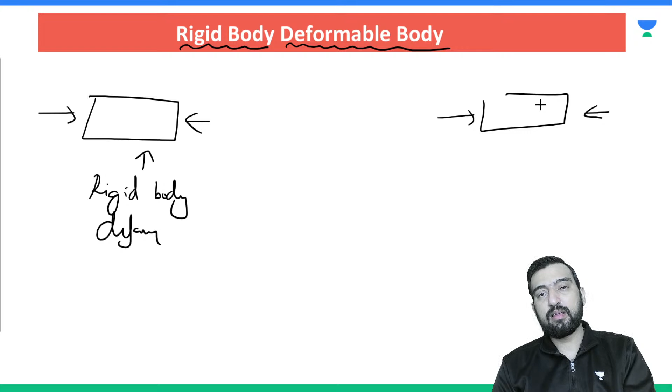Whereas deformable body, on the application of forces, they change their shape and size. They can be contracted, they can be expanded, their volume can be lesser, their volume can be more. They can show you some transverse lateral deformation and all. So this is the property of deformable body. So strength of material is all about deformable body, and it's all about the internal forces, and due to internal forces stress induced.

Whereas engineering mechanics is just like your class 11th physics, where you find acceleration, angular acceleration, velocity, displacement and all. You can also say that in mechanics, in rigid body, you are making a net force, and due to that net force it shows you motion.

Whereas in strength of material, we try to keep the equilibrium of forces such that the stresses and strain developed in the members allow these deformable, elastic members to take the external load. By considering the action of external load, they show reaction in the form of stretching or shrinking, by contraction or expansion.

Therefore we can also say that SOM is deformable body physics, whereas engineering mechanics is rigid body physics. Got it? So rigid body physics is engineering mechanics, and deformable body physics is strength of material.

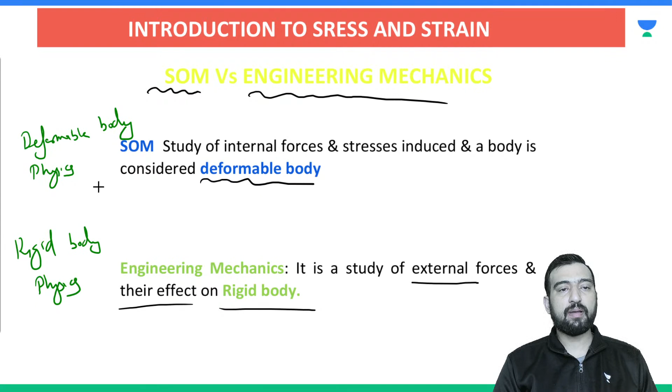For rigid body versus deformable body, I already told you that here the distance, shape, and dimensions don't change on the application of load. Here, in deformable bodies, the dimension or shape may change on the application of load.

Okay, so the type of stresses. What is stress? Stress is developed due to the internal force, and we can say that stress is internal force over area.

So why do we always deal with stress, not pressure? Can we calculate the maximum pressure a member can take, and design according to it? Dear Prakash, first of all you are asking why we always deal with stress, not pressure?

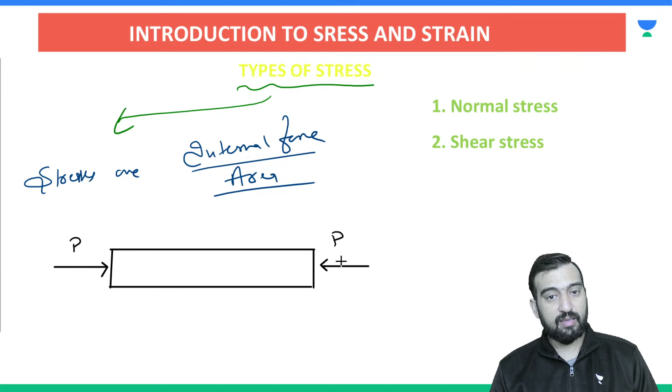Then P over area is not necessarily the stress. Maybe that stress is magnitude-wise P upon area only. But whenever you draw its free body diagram, it may look like this is P, and this is also P just to maintain equilibrium, and here it is also going to be P, acting on the remaining bar. So this P upon the cross-sectional area is developed due to the application of external load only.

But sometimes the stress is not developed as equal to the application of load. Such things we see in subjects like theory of failures, which explain all the consequences. These forces can be different in different orientations, so we have to be more accurate. More accuracy can be developed in terms of stresses, not pressure.

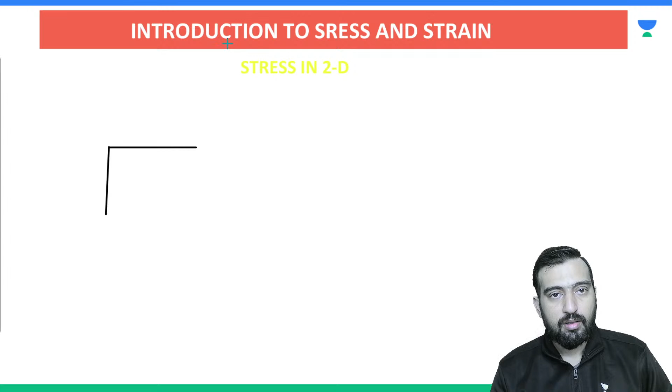So how many normal forces are possible? Suppose this is sigma 1, this is also normal stress - sigma 2. Now shear stresses are also possible. So shear stresses are also possible.

Shear stresses - if these surfaces look like this, then in order to maintain moment equilibrium, the shear stresses on the adjacent faces would be equal, counteracting each other, so that the net clockwise couple and net anti-clockwise couple remain the same. But the notation would be different - if it is tau, and this face is yx, then on the face x it is tau xy, and similarly this is also tau yx, this is also tau xy.

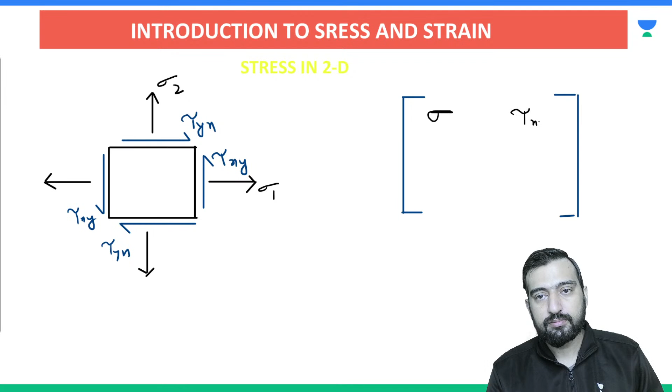So one shear and two normal stresses are there. If I want to write them in matrix form, then it would be sigma 1, and this would be sigma 2. Like that we can write the stresses in 2D.

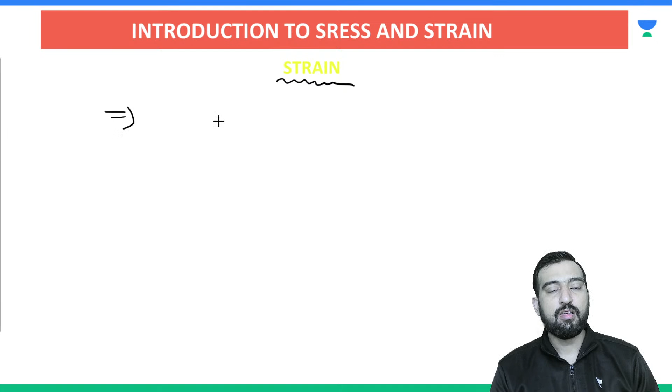So strain is a change in the dimension with respect to the original dimension. So if I want to write the general definition of strain, simply you can write it as a change in dimension with respect to the original dimension.

Okay, are you getting the point or not? So again like stresses, strain can also be of two types: one is normal strain and another is shear strain. What is normal strain? Normal strain is just like your longitudinal strain, and shear strain is your tangential strain.

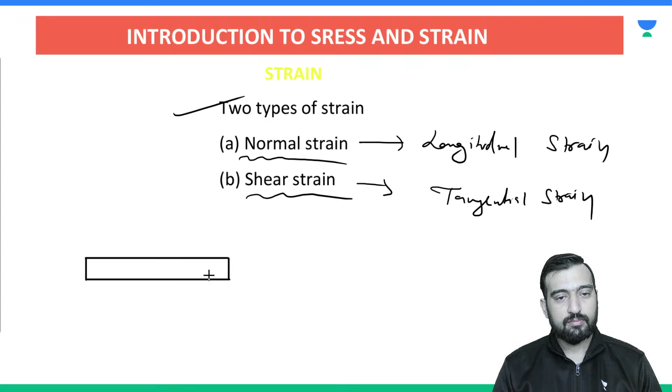Suppose this is some stress and due to this the dimension gets changed, so it is going to increase like this.

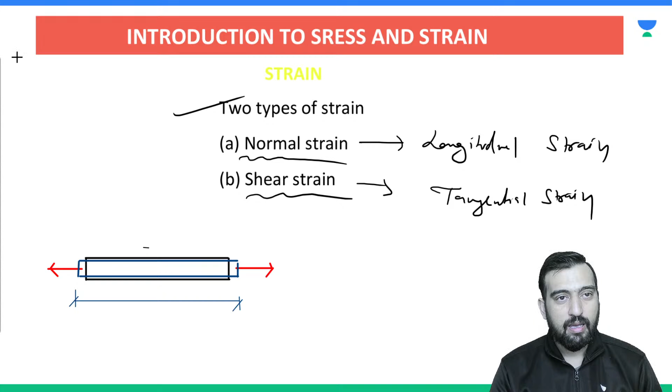So let's say the original dimension of this bar is L, or let's say it is L naught, and after this force, extension is there. Now it becomes L naught plus delta L. So longitudinal strain is what? Change in dimension with respect to original dimension.

But shear strain is somewhat different. What is there in shear strain? What do we do in shear strain?

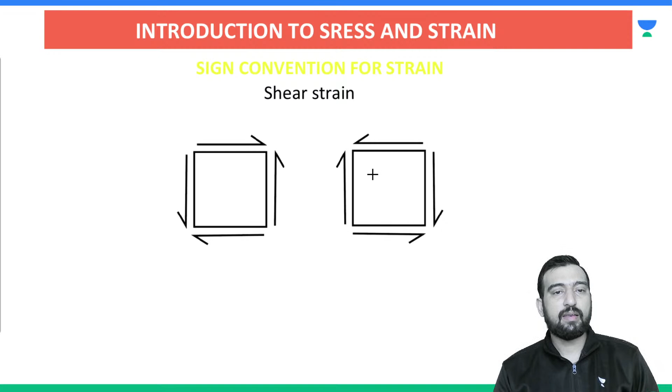So for shear strain, we are taking this one as positive, and this shear strain as negative. As per convention, we take it positive or negative. There is one more way to identify positive and negative, so let me discuss that here too.

Like here I called this tau yx positive, why? There was a logic behind it. You could ask, sir, when do we take it positive, when do we take it negative? Like normal stresses, it's quite clear - if it's going away we take it positive, if coming towards we take it negative. So compressive stress is negative, tensile stress is positive. But these things are not easy to visualize in shear. In shear, what should be the convention? Anybody? In shear stress, what should be the convention?

This is xy and this is yx. So both of them I have shown as positive. But what is the convention? Tell me, what is the convention?

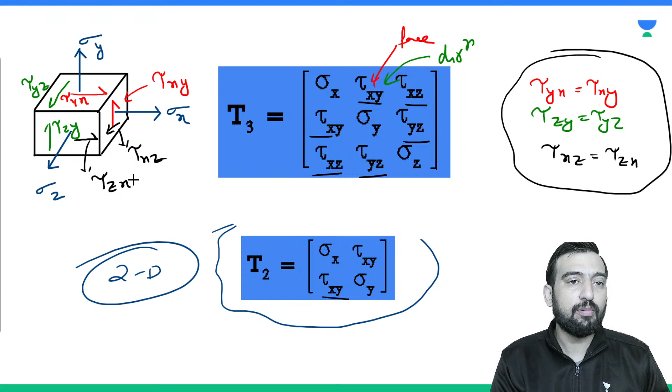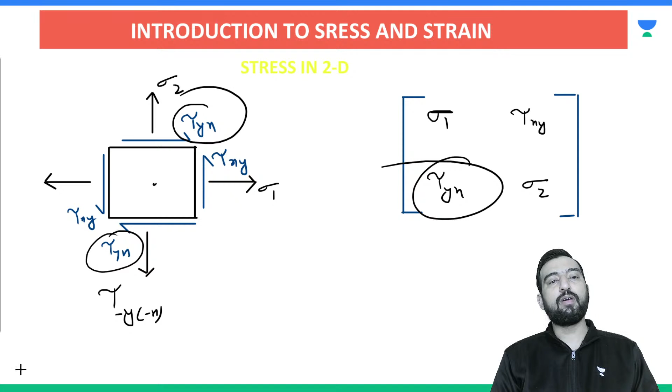Okay, so positive face, positive side, positive direction - it's positive. And negative face, negative side, negative direction is also positive, because negative times negative is also positive. Like this is positive yx. What about this one? It is negative y, and direction is also negative, so minus y times minus x is also tau yx. Like that we can define the sign convention of stresses.

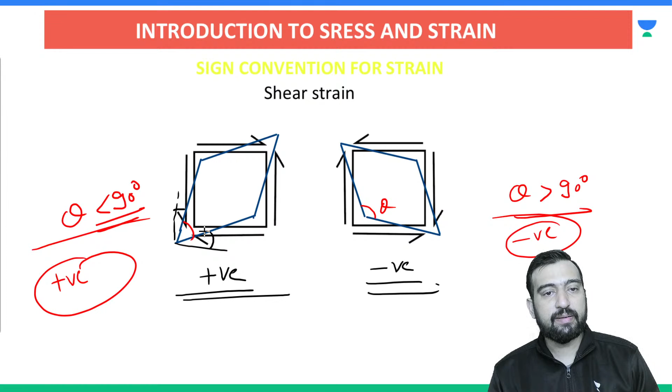What is this gamma xy by 2? Suppose this is the total strain. This plus this is gamma xy. Let's suppose the initial angle was 90 degrees, so it is now 90 minus theta, so gamma is going to be 90 minus theta. Due to the symmetrical or equal value of shear stress developed on these two consecutive adjacent faces, the angles on both sides are considered to be the same. So if they are same, and total deformation is gamma, then on one side the deformation is gamma by 2. So let me call it gamma xy by 2, and gamma yx by 2. Like that we can define this.

So this is tau xy, so I am writing gamma xy by 2. This is tau yx, I am writing gamma yx by 2, because it is assumed the total strain - this plus this - is the total strain, and it is 90 minus theta, and this both strain has to be same because the same kind of stresses are originated on these two adjacent faces. So these two strain values are also same, but the net strain in this direction is this angle plus this angle, and fortunately both of these angles are same, so we are simply dividing these strains into half value.

Similarly, tau xz is gamma xz by 2, gamma zx by 2; tau yz is gamma yz by 2, gamma zy by 2. Okay, so it's going to be like this.

Are you getting the point or not? Tell me, everybody. Any doubt to anyone? So, what is the total strain in the xy plane? Anybody? What is the total strain in the xy plane?

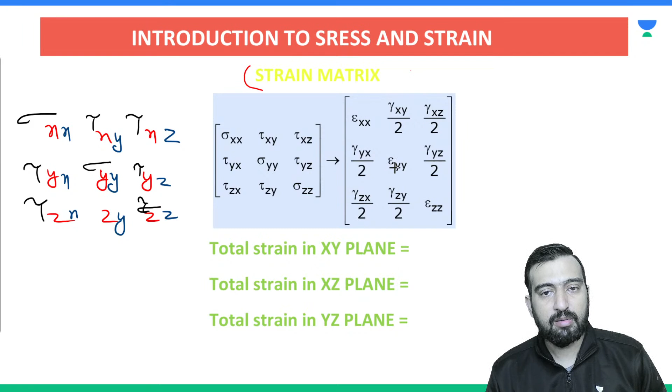How much will it be? Normal strain is epsilon yy - no doubt, sure. So how can you find the total strain, normal strain? This is the total strain in the xy plane. This is the total strain in the yz plane. This is the total strain in the zx plane.

I want to explain this with the help of a 2D figure. With the help of a 2D figure, we can explain it, dear. Suppose this is the deformation in the x direction, let's say u. This is the deformation in the y direction, let's say v. So what is the shear strain due to this u? It is del u with respect to transverse distance del y.

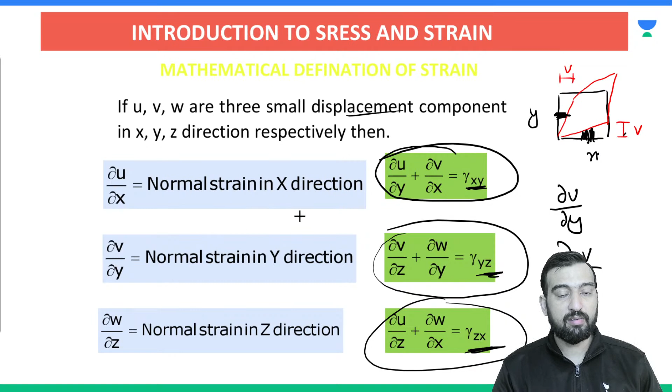Now we will be moving to the stress strain curve. What is the stress strain curve for mild steel? It is the second aspect of this chapter. We used to read this curve so many times in civil engineering - in Steel, in RCC, and in SOM too, where it gets the most attention.

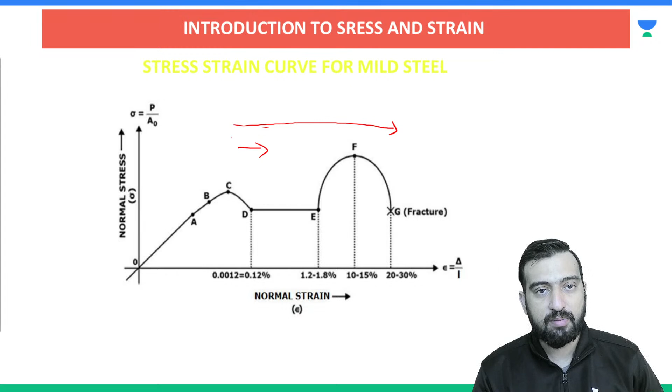So this is the meaning of this end-game marathon session. This is the stress strain curve for mild steel, and I was telling you that the longer after yield the fracture occurs, the more ductile the material is. If fracture happens immediately after yield, the material falls in the brittle category, like concrete. If fracture happens long after yield, the material falls in the ductile category, like steel, mild steel.

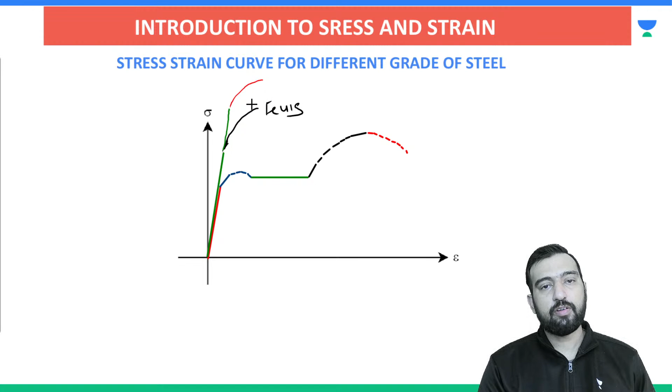Okay, then what happens with different grades? Different grades may look like this. It is Fe250, and let's say this one is Fe415, and this one is Fe500. So all these are different grades of steel — this is Fe415, this is Fe500, and this is Fe250 or mild steel.

So these are known as HYSD steel. As you increase the grade of steel, you can see their elastic limit is increasing. But what about their elastic limit? How can we determine it? Here there is not a clear upper yield point or lower yield point.

So in such material, what you do is take the help of proof stresses. For materials whose elastic limit is not clearly defined, we use proof strain and proof stresses. What is proof strain?

Proof strain is 0.2% strain, and the idea is that from 0.2% strain you draw a line parallel to the initial tangent. Wherever this line cuts your original graph, that point is considered your yield point. So they are cutting this graph here.

So this one you call Fe415 and this one you call Fe500. Okay, so this strain is how much? This is proof strain and it is 0.0020. So like that we can draw the stress strain curve for different grades of steel.

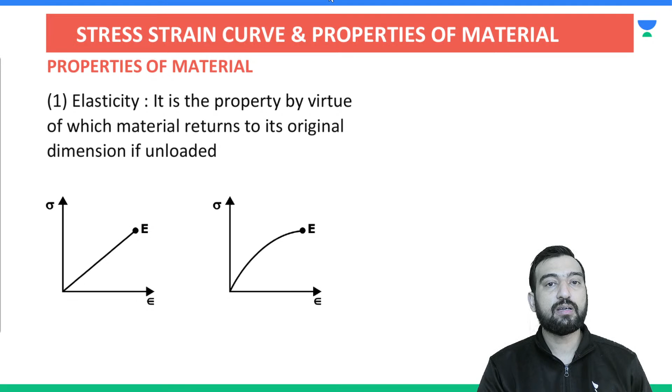Okay, the third one is creep. What is creep? It is the property due to which material undergoes additional deformation due to applied load with passage of time under sustained loading, called creep.

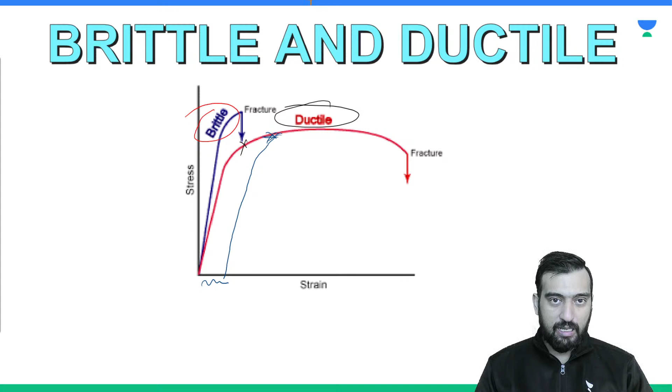You applied load within elastic limit and still there is some permanent deformation. This can happen only if that load is applied for a very long period of time. Such deformation occurs when the load stays applied for a long duration, and after removing it, there is some permanent deformation in your material.

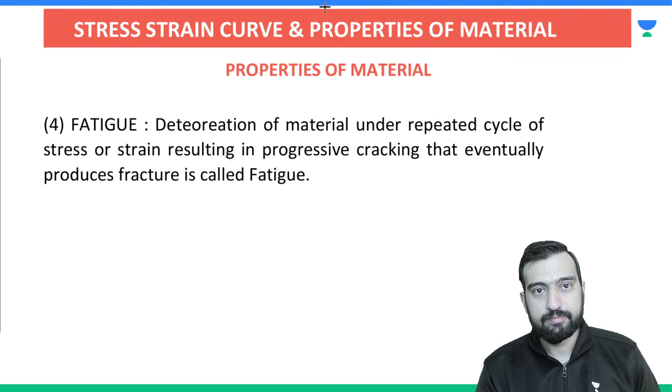Okay, so this is fatigue, and there are many other properties like resilience, toughness, hardness, malleability. What is resilience?

What is resilience? It is the property of material by virtue of which it absorbs energy when deformed elastically and releases it on unloading. So what is resilience, dear? It is like when you have done this.

Okay, so let's suppose you have a graph drawn like this. So here you can see that it is the resilience up to the elastic limit - whatever energy you have stored, that is resilience. In fact, it is the modulus of resilience if it is a stress-strain curve.

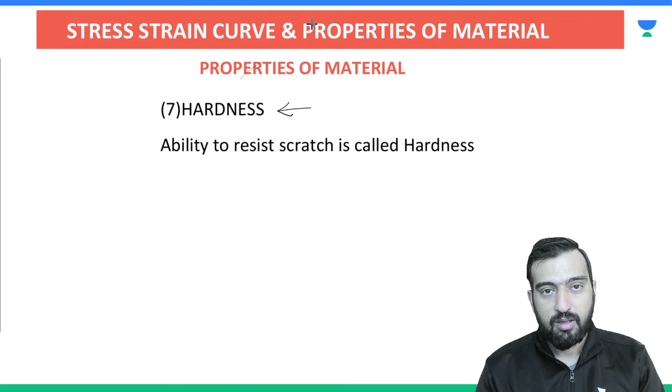So this may happen. This is the difference between toughness and hardness. Are you getting the point or not? Tell me.

Okay, so now what are all the stress-strain curves? Suppose if a material is elastoplastic.

Elasto means linear behavior, plastic means... okay. If your material is elastoplastic with strain hardening - so this is elastic, stress is proportional to strain, and it will come back after unloading.

And if it is with strain hardening, then this will go like this - instead of being perfectly plastic, it shows some strain hardening. This means beyond the elastic limit, your material will take more stress along with strain.

Okay, if it is an ideal rigid material, then no matter how much force you apply, the strain is always zero in an ideal rigid material. Are you agreeing?

Ideal rigid means strain is always zero, no matter how much stress you are applying. You continuously increase stress but there is no increment in the strain. Are you getting the point or not?

And what would happen in an ideal fluid? In an ideal fluid, without any normal force, you are going to have continuous flow, or you can say continuous strain. Is it clear?

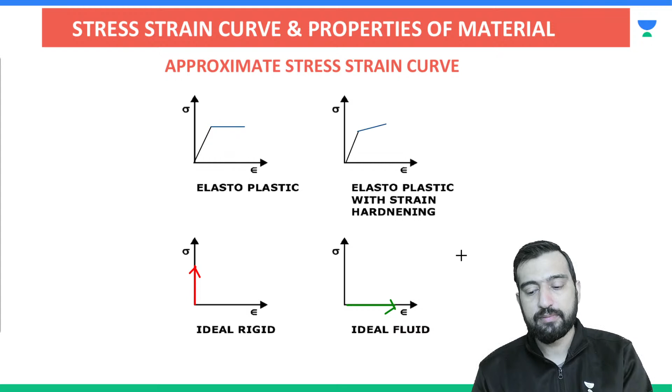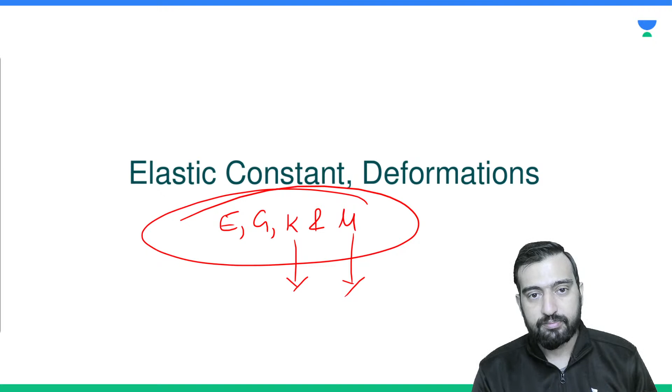So Young's modulus or modulus of elasticity, it is denoted by E. It is the ratio of normal stress to normal strain under the effect of uniaxial loading. Uniaxial loading means only in one direction.

Only in one direction you are going to apply this. It is not necessary that always the lengthier side is going to be the axial side. It may happen that in some cases you are going to apply force like this.

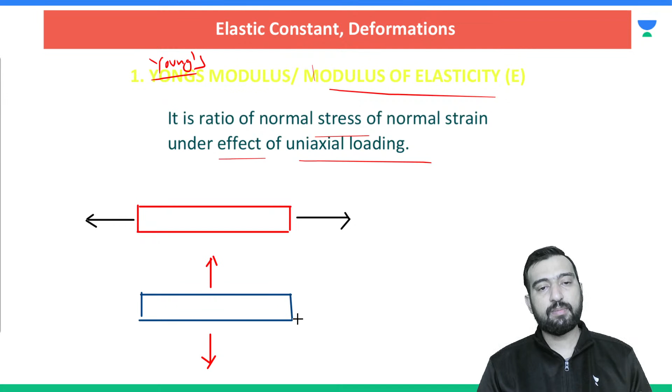Then here, Young's modulus would be the change in dimension along this direction with respect to its original dimension. So Young's modulus is always along the longitudinal axis.

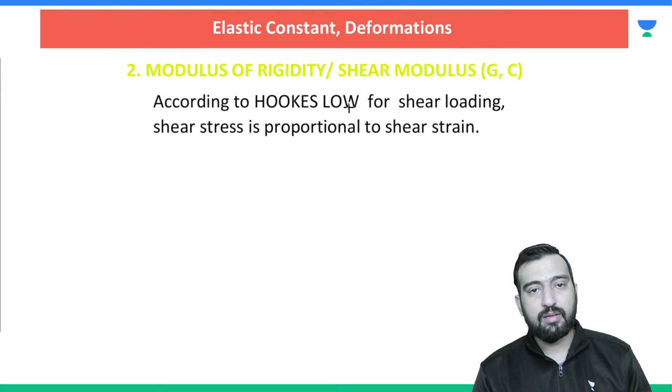Similarly, there is the shear modulus, or you can say modulus of rigidity. So what is the modulus of rigidity? It is simply the shear stress upon shear strain.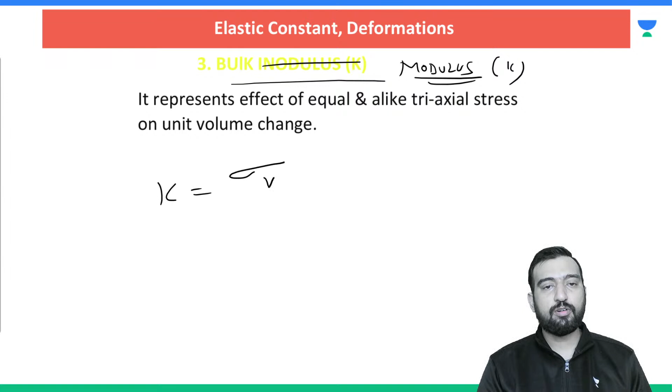Now if I am talking about the bulk modulus, what is it? It is the volumetric stress upon volumetric strain. So this is the bulk modulus.

So you know what is happening in bulk modulus. In bulk modulus you are applying stresses in multiple directions, like hydrostatic forces and all. This is the case of bulk modulus, due to this volume changes and all.

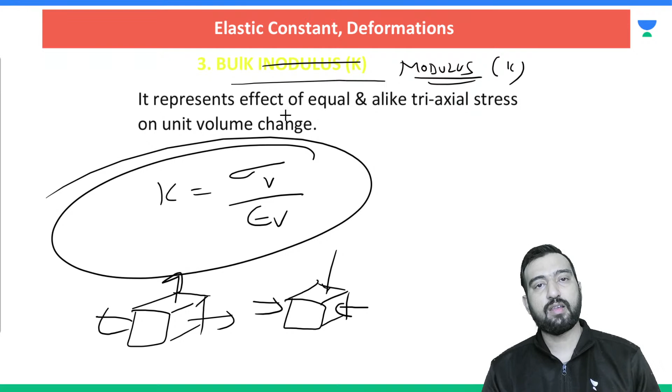In fact, bulk modulus value or strain in the volumetric direction you can calculate as per the strain in the x direction, y direction and z direction. So this is the Poisson's ratio, the ratio of lateral strain to the longitudinal strain under uniaxial loading.

So suppose if you are pulling this body, its dimensions, let's say this is L and this is B. So when you are stretching it, then it is coming out to be... then it is coming out to be what?

And it is B minus dB, del B. So here the longitudinal stress, longitudinal strain is how much? Here longitudinal strain is delta L over L. This is lateral stress, or simply strain is dB over B. So Poisson's ratio is defined as the ratio of lateral to longitudinal.

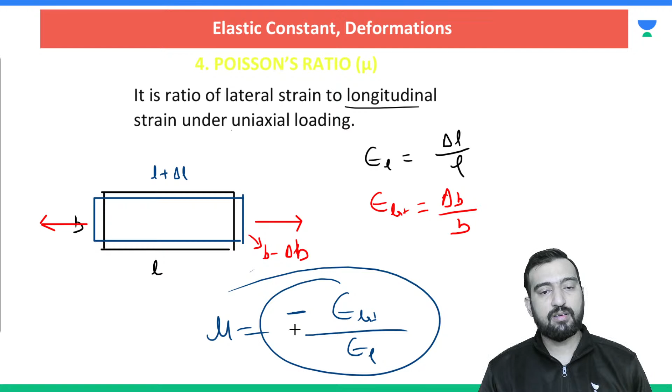Normally for engineering material this ratio lies between 0 to 0.5. For engineering material it is going to lie between 0 to 0.5. But if you are even considering the polymers and biological elements, then it may vary from -1 to 0.5.

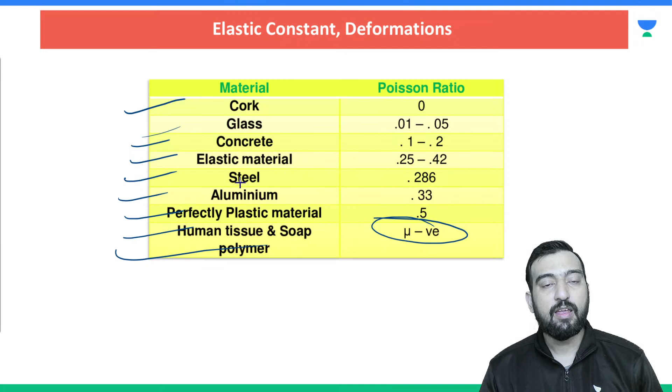So you can have a rough idea of this. So if human tissues or polymers etc. are not used, if you are talking purely about engineering material, then it is 0 to 0.5.

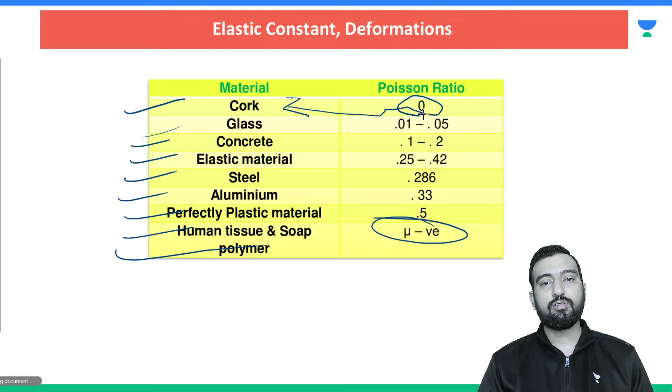And you know, due to this 0 Poisson's ratio, cork is used - we'll discuss that sometime later. So cork is going to show many unique properties due to the 0 Poisson's ratio. Meaning no change in the lateral direction along with the longitudinal direction. If you are making changes in the longitudinal direction, no impacts come in the lateral direction.

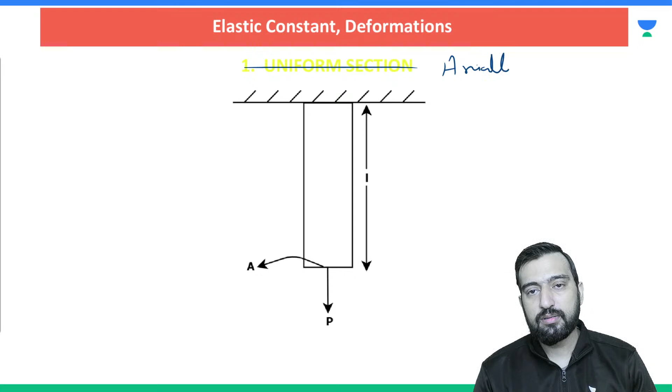Okay, so now for axially loaded members - what are axially loaded members? Where we apply forces along the axis. So what is happening here? If my member is axially loaded, then deflection is going to be PL upon AE.

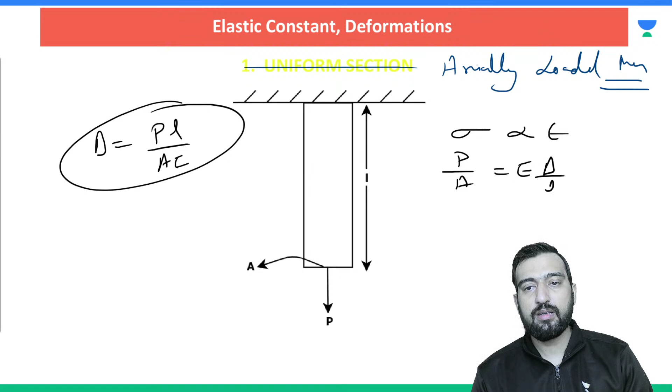As we know that stress is proportional to strain, longitudinal stress. What is longitudinal stress? Force upon area, and it is equal to the constant, and the constant, you know, is Young's modulus. What is strain? So delta is equal to PL upon AE. So this is the normal deformation in case of a uniform section.

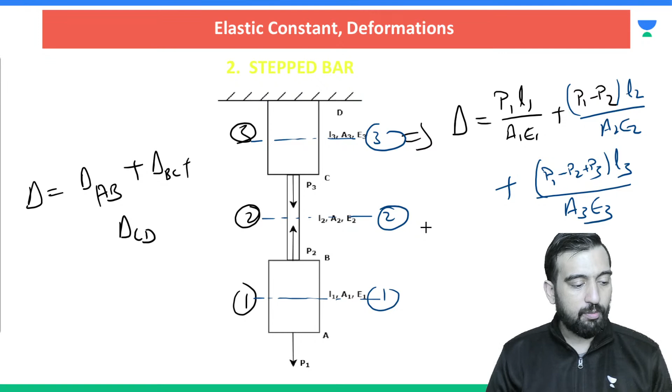Are you getting the point or not? Tell me. So this is a stepped bar.

Now we can also find the deflection due to rectangular tapered bar or the circular bar. Let me show you. Suppose if rectangular tapering is being done in one direction, like this.

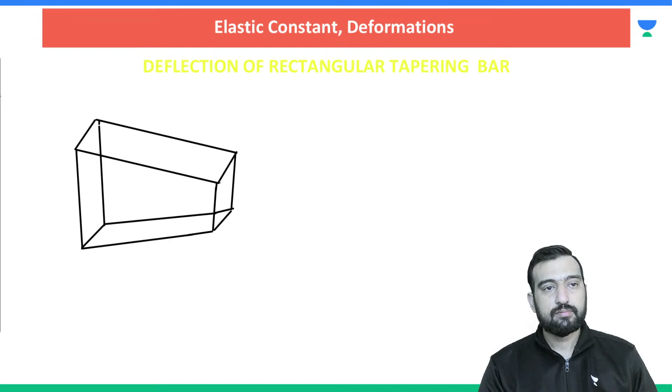Let's suppose this thickness is constant. Understand how the tapering is - it is not bidirectional, it is unidirectional. So tapering is unidirectional here, it is not bidirectional, okay.

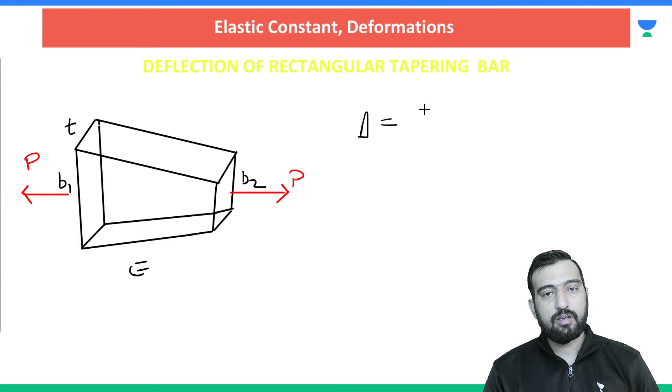So here the deflection is equal to P L upon A E. E we keep as it is. Now what is A? How much do we take A?

A we also take as the weighted average, sorry, logarithmic average. So what is the logarithmic average here? Who is varying here? Width.

Thickness is constant, so I can write thickness as it is. Now for width I can write it like B1 minus B2. It is the logarithmic average upon log of B1 by B2, log of B1 by B2.

Generally we use three types of averages in mathematics. One is arithmetic average, second is geometric average, third is logarithmic average. Arithmetic average is where the things are proportioning linearly or in a directly manner. Geometrically, where the things are varying geometrically, meaning the difference between two consecutive values is increasing rapidly and can be captured by some common ratio. Third is logarithmic, where the variation is like inverse, in an inverse manner. Here area is coming in the inverse, so it is in inverse manner variation.

Okay, yes, Anurag is absolutely right. It is T into B1 minus B2 upon log ln B1 upon B2.

Had it been a case of circular tapering beam, in that case what could we have written? Suppose this is my circular tapering beam, then what could we have written here? Suppose this is diameter 1, this is diameter 2, and length is same, and again it is subjected to same tensile load, let us call P and P. So anybody, what is the expression of deflection here?

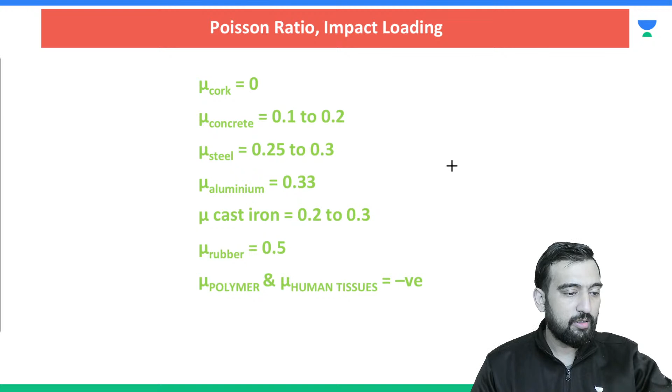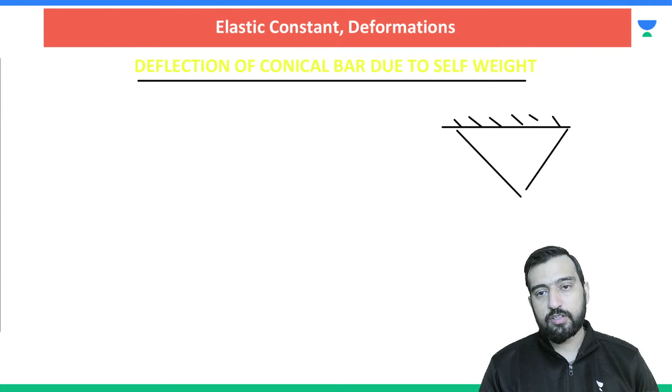What is the deflection of conical bar due to self weight? This is a cone. You can consider the unit weight of this cone as gamma, the length of the cone as L, and the radius as R. So what is the deflection due to self weight of the cone?

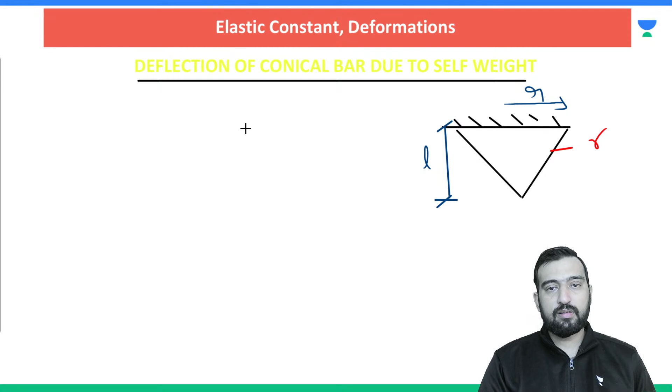The deflection is simply gamma L square upon 6E, where E is the Young's modulus. Please remember this equation. Or if you want to calculate it in terms of self weight, gamma is weight upon volume, and volume is pi by 3 into r square h.

So 1 by 3 pi r square into h, into 6. So this can be written as WL, where pi r square is area. If you solve this, it becomes 3 into 2 pi r square area into E, so delta is WL upon 2AE. So the deflection of conical bar due to self weight is WL upon 2AE, and here it is not by 3, it is by 2 only. Yes, Anurag is right, it is by 2 only.

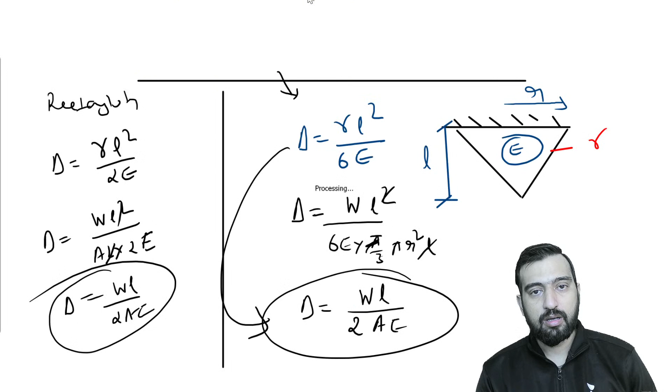If this were a rectangular beam case instead of conical, what would come due to self weight? It is gamma L square upon 2E, and gamma is equal to weight upon volume. Volume would be area into L, into 2E. L and L cancel, so the answer comes to WL upon 2AE. So it is again half of self weight, due to the half of self weight. So rectangular tapering and circular tapering we have seen.

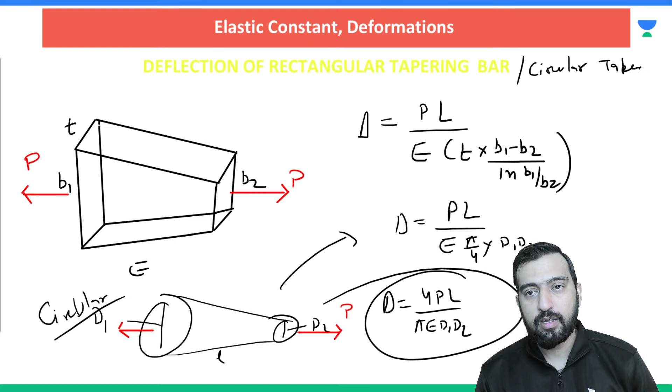Poisson ratio is minus lateral upon longitudinal. This we have already seen.

Now what are the temperature stresses? From class 11th onwards, in thermodynamics, we have seen that whenever we increase the temperature, the length, area as well as volume of the object changes. If the temperature is increasing, this change is positive. If the temperature is decreasing with respect to the standard temperature, then these changes are negative.

If I am talking about linear expansion, then the incremented length of any dimension can be written as delta L is equal to initial length into alpha into delta T, where delta T is the difference in temperature, which you can calculate either in degree Celsius or in Kelvin. Alpha is known as the coefficient of thermal expansion and L is the initial length of the material. So if you simply want to check how much your material length has increased or decreased, it is L alpha delta T, isn't it?

So you can compare the coefficient of thermal expansion of various materials like copper, brass, aluminum, and steel. Aluminum has the highest coefficient of thermal expansion, then brass, then copper, and steel has the least coefficient of thermal expansion. There is one more beauty of steel here: its coefficient of thermal expansion exactly matches that of concrete, and this is the reason why steel is very widely used in concrete.

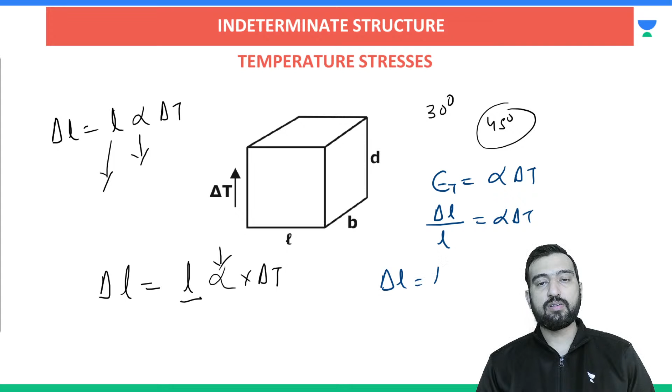Actually it is said that thermal strain is simply alpha delta t. And what is thermal strain? Initial change in dimension due to the temperature upon original dimension is equal to alpha delta t. So change in dimension is equal to L naught alpha delta t. Just I am comparing the value of alpha of different materials which we commonly use in strength of material - it is for copper, brass, aluminium and steel. Copper, brass, aluminium और steel के लिए हम use करते हैं.

So deflection of conical bar is equal to 1/3 of the prismatic one. हाँ, ये आप कह सकते हो कि डिफ्लेक्शन ऑफ कॉनिकल बार इज इक्वल टू 1/3 ऑफ द प्रिज्मेटिक बार. बट आपने सेल्फ वेट बाय 3 लिखा था पहले, इसलिए मैंने आपको ऑब्जेक्ट किया. इट इज सेल्फ बाय 2 ओनली. Yes, if we are comparing it with respect to the rectangular, then it is 1/3. आप देख सकते हो यहाँ पे, मैं दोबारा दिखा देता हूँ आपको - ये 1/2 है, ये ऐसे देख लो 1/2 आ रहा है, ये 1/6 आ रहा है. So 1/3 times of rectangular, this you can say.

चलो, so these all are the coefficient of. Is it clear, dear Preeti? सचिन क्लियर, अच्छा ठीक है.

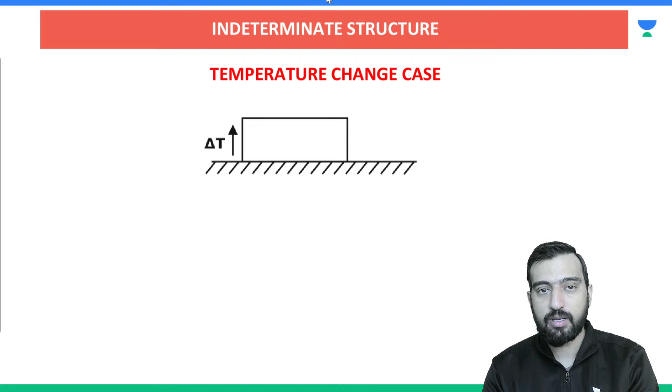अच्छा ये है हमारे अलग अलग मटेरियल के कोएफिशिएंट ऑफ थर्मल एक्सपेंशन. मतलब जब टेम्परेचर चेंज होगा तो सबसे ज्यादा इंपैक्ट इन चारों मटेरियल में कौन दिखाएगा? एल्युमिनियम, फिर उसके बाद ब्रास, फिर कॉपर, फिर स्टील. तो स्टील का कोएफिशिएंट ऑफ थर्मल एक्सपेंशन इन चारों में कम है. अच्छा, टेम्परेचर बढ़ेगा तो आपकी लेंथ भी बढ़ेगी, आपकी विड्थ भी बढ़ेगी, आपकी हाइट भी बढ़ेगी. तो जनरली होता क्या है कि due to the change of temperature your each and every dimension changes if it is free to do so. अगर कोई रेस्ट्रिक्शन नहीं है तो टेम्परेचर बढ़ने के कारण डायमेंशंस चेंज होंगे, और बढ़ने के कारण डायमेंशंस बढ़ेंगे, कम होने के कारण डायमेंशंस कम होंगे.

OK, if the deformation due to temperature change is restrained then stress will be induced. And normally in indeterminate structures, अगर देखो मैं यहाँ पे एक बार लगाऊं, मैं कहूं कि यार यहाँ पे मैंने टेम्परेचर बढ़ा दिया, but this time the material is not free to expand. No doubt due to the increment of temperature, this member would be trying to elongate itself, but it is not getting proper space. So when those thermal strains which would have been there if it would be free, then those temperature strains or thermal strains will be leading towards your thermal stresses, dear. Will be leading towards the thermal stresses.

So whatever would have been the thermal strain, now the thermal stresses originated would be in that manner. Suppose earlier the thermal strain developed was 2 units, now when those 2 units strain is blocked, the stresses will develop accordingly. Suppose if earlier strain developed in thermal was 4 units, now the stresses developed would be double of that - it would be relative. ओके तो या तो टेम्परेचर बढ़ने के कारण डायमेंशंस बढ़ेंगे, अगर आप डायमेंशंस बढ़ने नहीं दे रहे हो देन करस्पॉन्डिंगली स्ट्रेसेस आएंगे, तनाव आएंगे आपके मटेरियल के अंदर. सो दीज आर नोन एज द थर्मल स्ट्रेसेस.

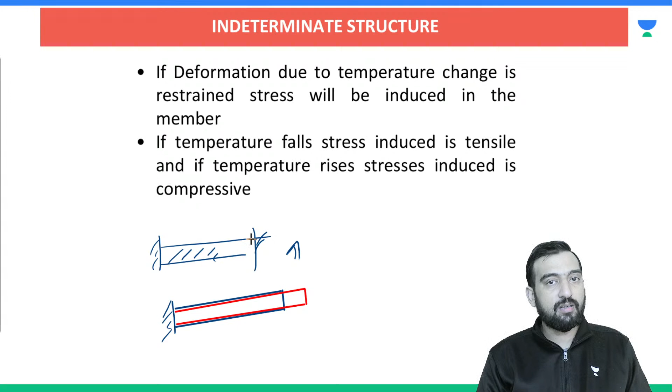So in case of composite bar, whenever we have two composite bars attached together and they are also fixed, let's suppose this is copper and this is aluminum - let's say steel. We know the coefficient of thermal expansion of copper is more than steel. Abhi maine aapko yahan dikhaye the, dekho copper ka 16 aur steel ka 13.

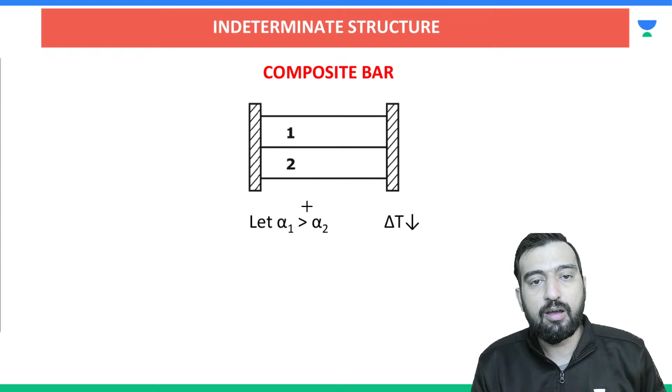And anybody, what would happen if instead of increment I am talking about decrement? Suppose instead of increase, I am talking about decrease, then what would happen? Anybody? Tell me the cases here, dear.

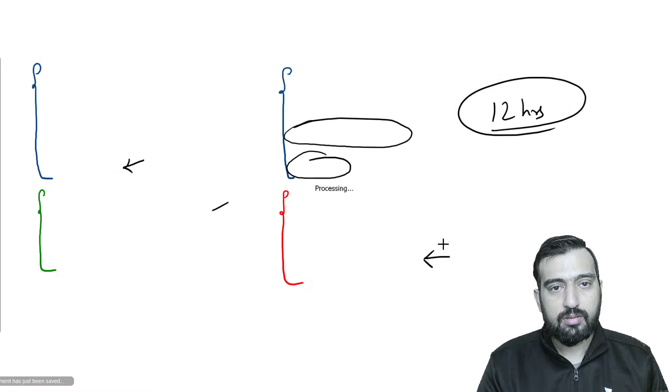So I would like to start SFD BMD now, but if you say, then we can take a 5-minute break. Are you all agreeing? Let's take a 5-minute break. Tell me.

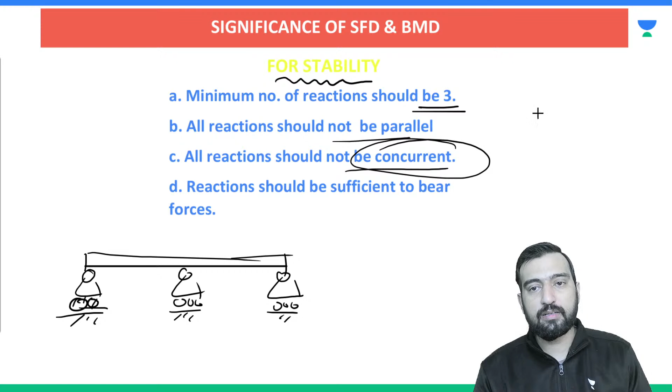Suppose this is my beam, and I have 3 reactions, but these 3 reactions are parallel. So it can show some rigid body deformation in the x direction. No doubt you have 3 reactions here, but it is still able to move. And if we are talking about concurrent, then this is the case. What is concurrent?

Concurrent is when the reactions meet at a common point. So this is the concurrent point. Here you can see that the rigid body deformation will happen for an inclined load or horizontal load, and here the rotation would happen about that point. So this is rotational motion, and here it is linear motion.

So it doesn't matter, we need 3 reactions. The point is that the 3 reactions must be non-parallel and non-concurrent, because if reactions are parallel then linear instability will be there, and if they are concurrent then rotational instability will be there. Similarly for a 3D structure, this was for 2D structure. For a 3D structure, we need at least 6 reactions for stability, and these 6 reactions should also not be parallel, should not be concurrent, and should not be coplanar.

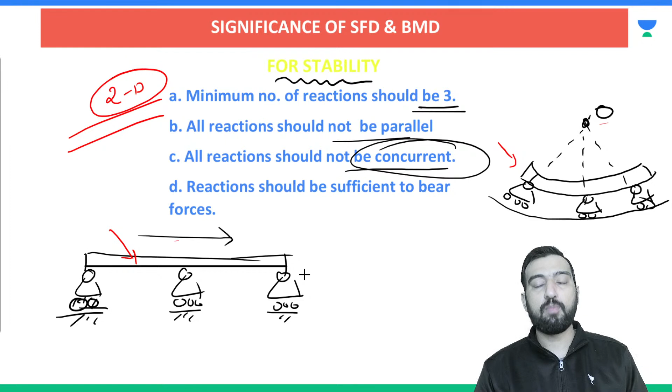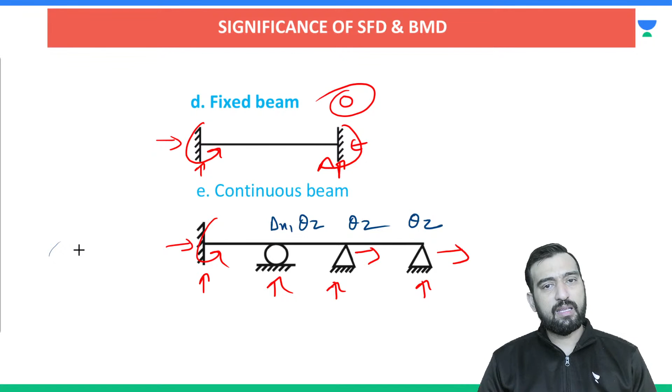But in strength of material we primarily focus on forces, and that too we are talking about the determinate structure. Now what are determinate structures? Determinate structures are those structures which can be solved only with the help of equilibrium equations. They do not need any additional equation like compatibility and all. Okay, there are some linear displacement relations, compatibility relations, but those relations are not needed in determinate structure. Once again, I am saying they can be solved only with the help of equilibrium equations.

For analyzing structures like indeterminate structures and all, we use structural analysis. There we have multiple approaches to solve such structures. We can check the degree of freedom of the structure, we can check the total number of unknown forces in the structure. Accordingly we can select the appropriate method to analyze such structure. But that is a separate session, that is part of structural analysis.

Right now we are restricting ourselves to strength of material only, where we have to analyze some basic determinate structure. It may be cantilever, it may be simply supported, or it may be any determinate structure where at most 3 unknowns are there. And even if the unknowns are greater than 3, then we might be having some add-on equations to analyze such structure. So the key point is total number of unknown forces and total number of available conditions are the same in your determinate structure. That is why they are known as determinate structure.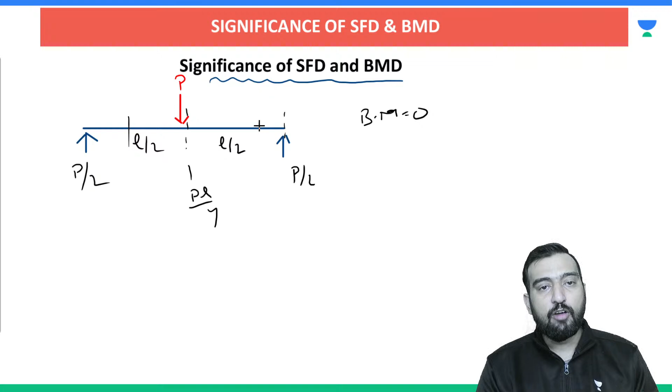So if I am asking you which is the most critical condition, rather than finding the bending moment at each and every point, you will simply draw its diagram. You will say P by 2 into X, where X belongs to 0 to L by 2. So it is going to vary like this, and it is going to vary like this. So this is your BMD.

So now just by inspecting this diagram, you will be able to tell others that yes, this is the location where bending moment is most critical, and this is the center point. So if you want to make this structure safe in bending, your benchmark should be PL by 4 - that's what your design will be based on. Accordingly, you will be designing your section. Are you getting the point or not?

So this is the benefit of drawing, the significance of drawing diagrams. Suppose if I want to make the diagram for shear force, then shear force as well is P by 2, and it is also P by 2 like this. So you can say that the critical condition for shear force here is P by 2.

If you want to make your structure safe in shear, then you would be designing it for P by 2 shear, like in RCC you used to do.

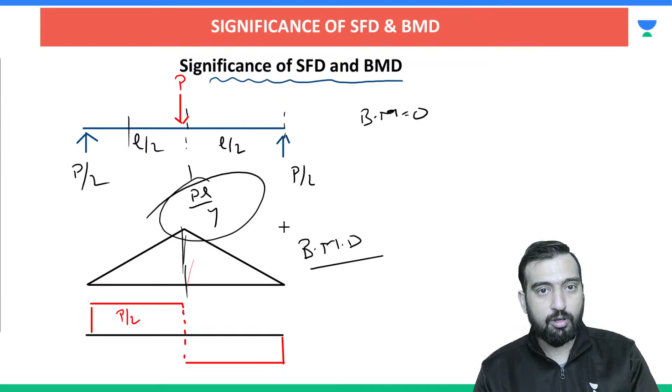Okay, so all these are the significance of SFD and BMD. So how to plot SFD and BMD and what are the definitions and exact procedures, I will be discussing from 2 o'clock, and for that I will be using a different link.